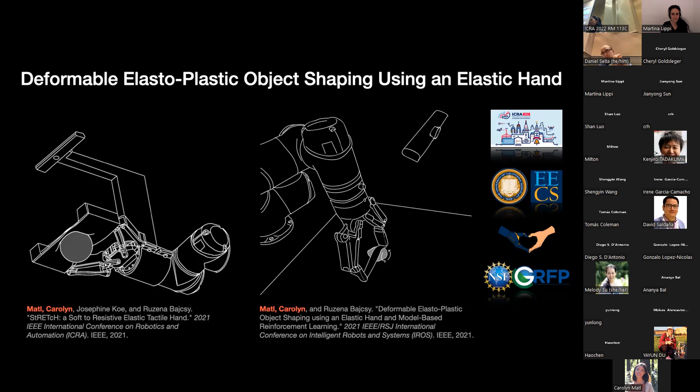Okay, so before we begin, let's first talk about what even is a deformable elasto-plastic object. In our work, and in fact many works that simulate these types of objects, we categorize doughs as 3D elasto-plastic objects - in other words, objects made of materials that exhibit both elastic and plastic properties.

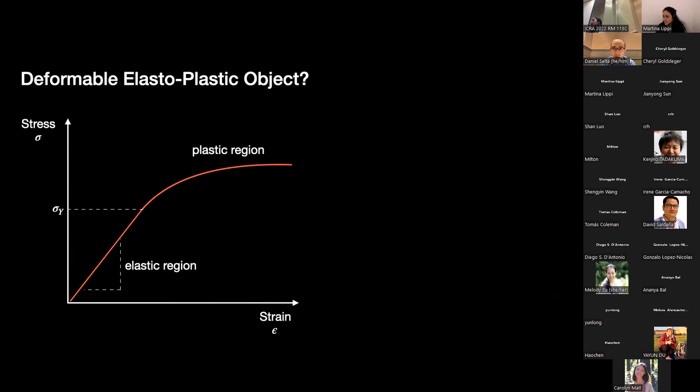A simple illustration of this characteristic should be very familiar to those of you who cook or bake. When you press into dough, some of it springs back, but there's also some permanent deformation that can result from this forceful interaction. So modeling this type of material sounds a bit complex.

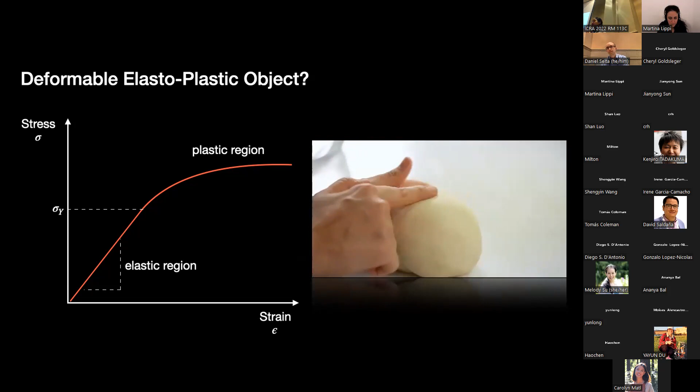And even so, we're already technically simplifying it by considering it as elasto-plastic, which is rate independent of the applied loading force, instead of viscoelastic, which is rate dependent. Luckily, in the context in which we have our robot interact with our dough, time is less of a crucial variable, so we can settle for this simpler material representation.

Okay, so given the characteristics of soft deformable material like dough, which has these regions of elasticity and plasticity, we wanted to come up with a way to interact with this type of material delicately - to enable both the perception of the geometry and stiffness of the material without creating any unwanted permanent deformation.

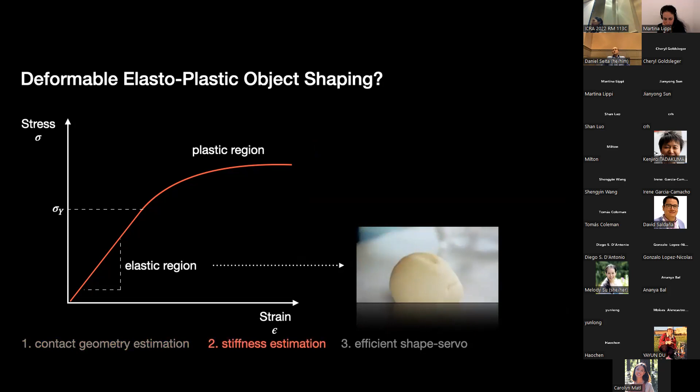So this would be perceiving within the elastic region, but we additionally wanted to enable intentional deformations of the material through interactions with sufficient load force. So this would be acting within the plastic region. And ideally, we'd like to also optimize how we interact with and manipulate these materials, and we want to explore these ideas within the context of shape servoing.

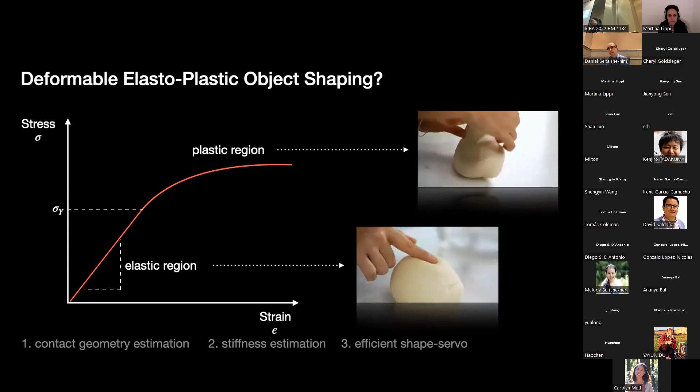Okay, so this talk will address these challenge criteria in two parts. In the first, we'll discuss how we designed a variable stiffness soft tactile hand that was used for both sensing and imposing load forces on deformable objects. In the second half, we'll examine how we can use this new technology to efficiently shape servo pieces of dough with model-based reinforcement learning.

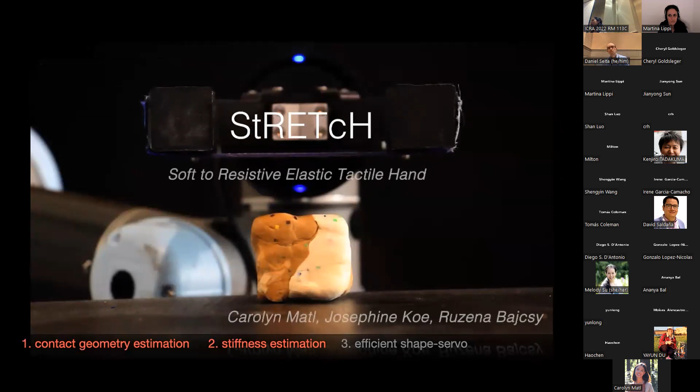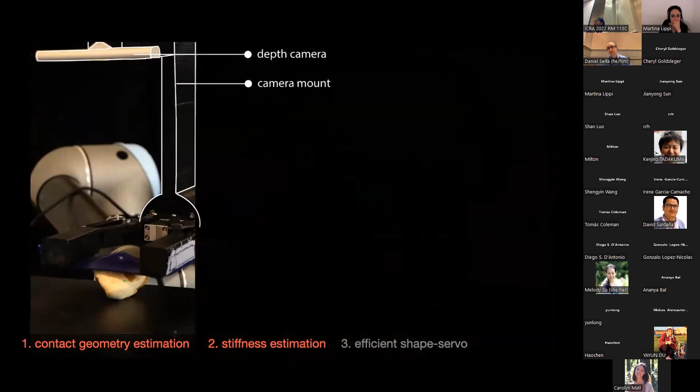Okay, so the first set of criteria ultimately led us to design this really simple hand made of soft compliant material, which we called StRETcH. The robot could vary the stiffness via a simple actuation mechanism by stretching the membrane.

So the soft tactile end effector that we designed can be categorized as a very simple soft optical tactile sensor, meaning that the tactile interface is made of soft compliant material, and when the membrane surface makes contact with the environment or an object, its deformations are imaged by an optical sensor like a depth sensor.

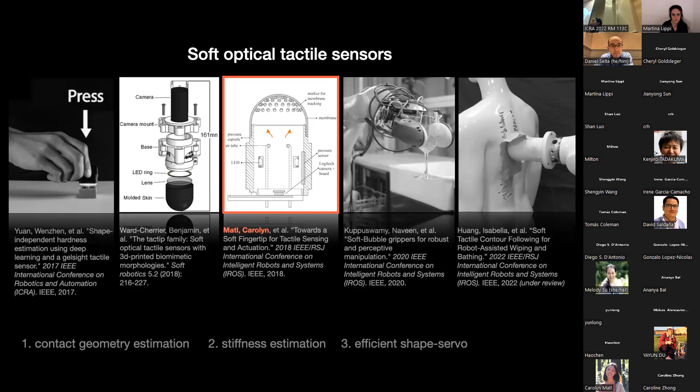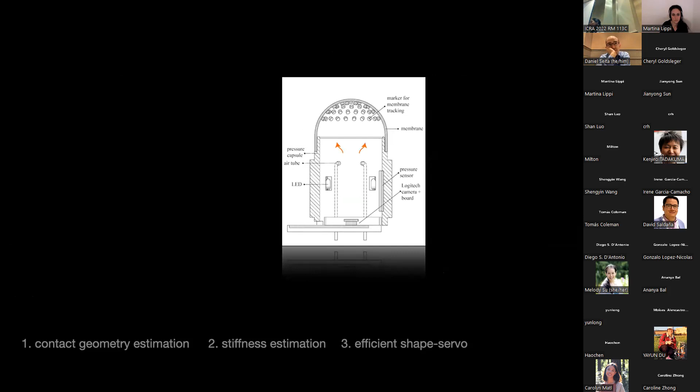Let me briefly explain why we did that. Because we were using pneumatics to maintain the shape of the fingertip, we could also leverage this actuation mechanism to stiffen the silicone membrane by increasing the pressure inside the capsule. So not only could this device act as a tactile sensor, but it could also act as an actuator and automatically adjust its stiffness to compensate for slipping.

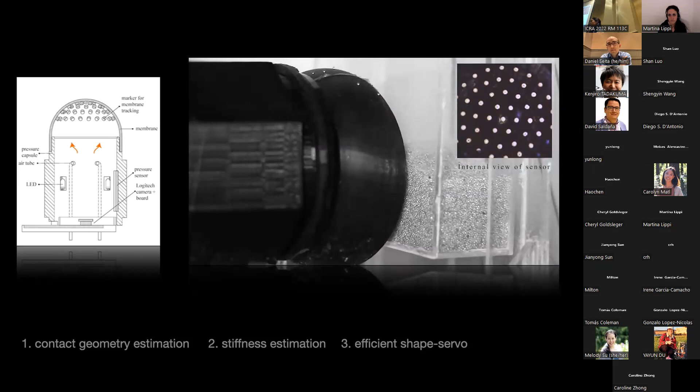For instance, to hold up this container that has dynamically changing mass. In this prior work, we studied this sensing and actuation duality and found that variable stiffness tactile sensing had a lot of potential in expanding robotic manipulation capabilities, including manipulation of deformable materials like dough, since we could leverage the fingertip in its soft regime to sense by interacting with the object within the elastic region.

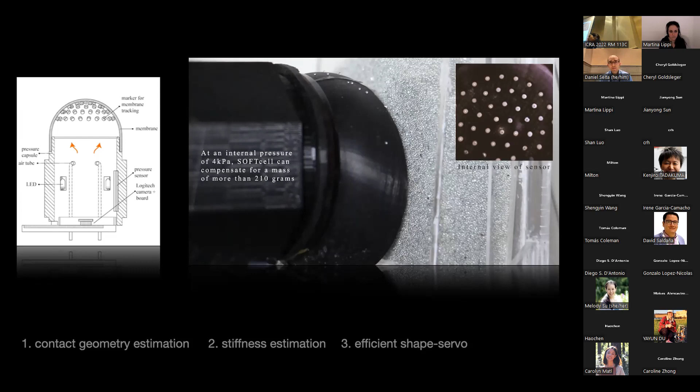We could also use the fingertip in its stiff regime to apply sufficient load forces to cause intended plastic deformations. But there were a lot of challenges with this prior design. For one, it was pneumatically actuated, which made it difficult to controllably vary the stiffness of the membrane. Overall, this was quite difficult and tricky to manufacture.

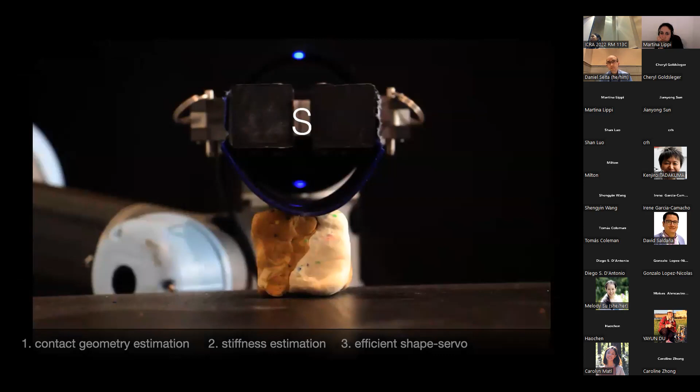Fast forward to 2020, the year of the lockdown, when we wanted to revisit this problem, but access to major design and fabrication centers was basically revoked. All of these challenges motivated the design of StRETcH, or Soft to Resistive Elastic Tactile Hand, which we were able to make with supplies I basically had already in my living room.

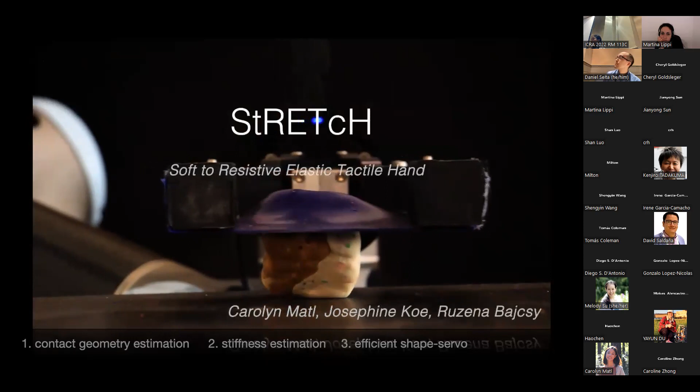As you can see, it's composed of a flat elastic membrane that can be cast easily by pouring EcoFlex silicone into a rectangular mold. We attach this membrane to a parallel jaw gripper using Velcro. So instead of varying stiffness via pneumatic actuation, here, as the gripper increases its width, the membrane's internal strain increases, which subsequently increases the stiffness of the membrane. This actuation mechanism makes variable stiffness much easier to control.

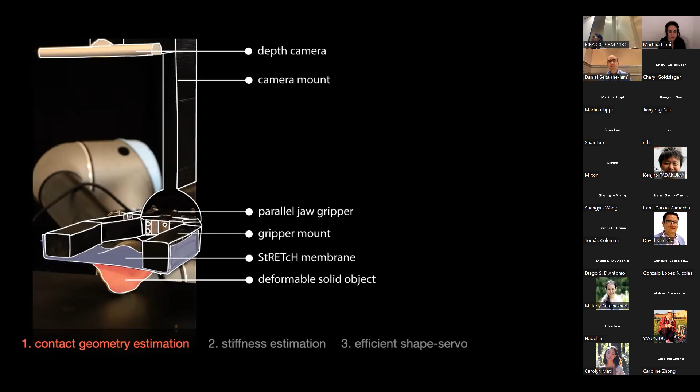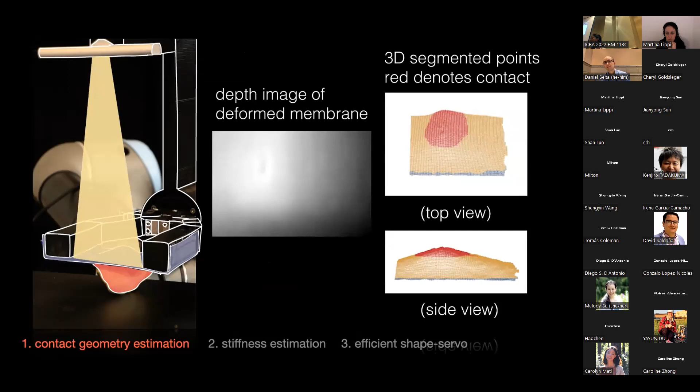We use a depth sensor to image the deformations of the membrane when it's in contact with an object. With the assumption that the object is convex, the robot can extract the portion of the membrane that's in direct contact with the object. So you can see it's really a bare bones, very simple flat version of the optical tactile sensors that we saw earlier.

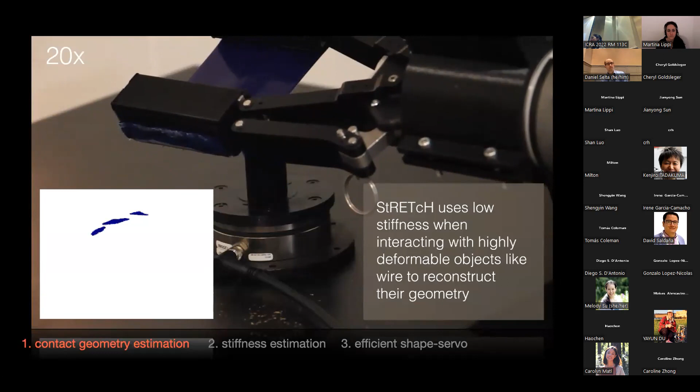Because StRETcH was so compliant, we were able to use it at its low stiffness regime to reconstruct the geometry of very deformable objects like paper boxes or 2D wire shapes like this circle, through touch.

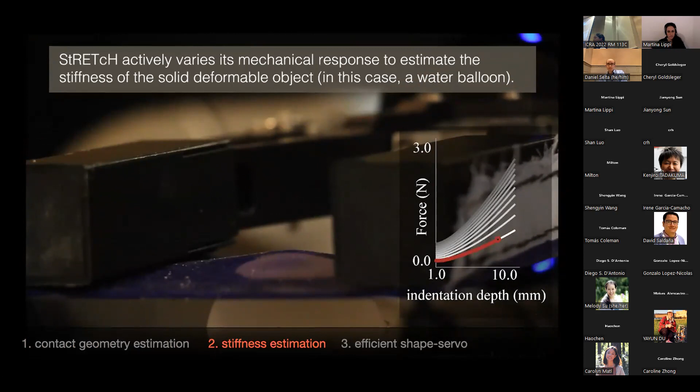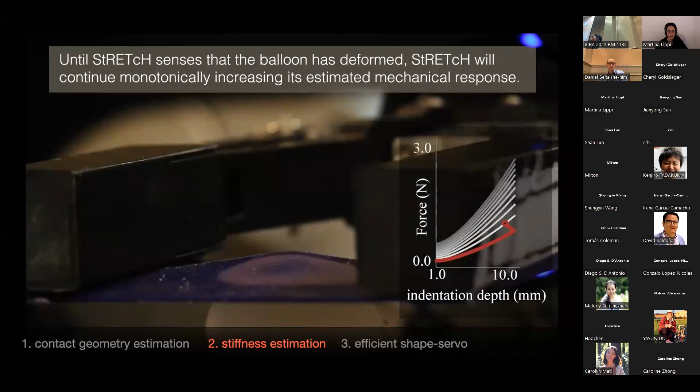Because StRETcH can vary its mechanical response, we can estimate the stiffness of deformable objects via active palpation. The graph on the right shows multiple indentation depth to load force curves corresponding to different stretch states of the membrane, where higher curves correspond to the membrane being stretched more. Ultimately, we want to find the force at which the object finally deforms. Since we imagine this object as having a single degree of freedom, we can divide this force by the amount of deflection to estimate a proxy for its stiffness in newtons over millimeters.

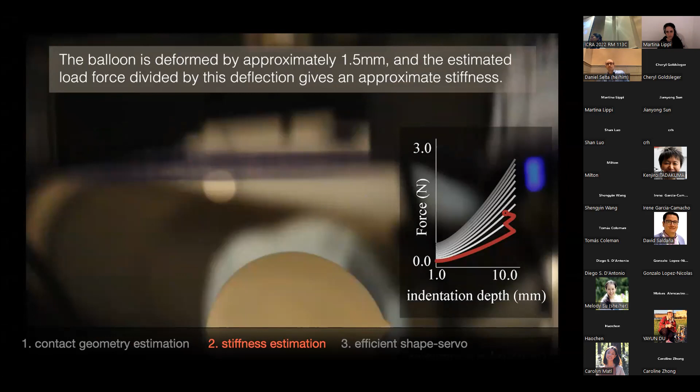We can use this force-depth profile to save time and efficiently modulate the stiffness of the membrane so that the load force increases monotonically with each new contact condition. So instead of starting from the lowest indentation depth every time the membrane is stretched, we can jump up this ladder to the next indentation depth that would result in the closest increased load force. This allowed the robot to efficiently approximate a stiffness value for the object.

The robot measured the stiffness of four balloons filled with different materials, as you see here. Even though these are technically proxy values for stiffness, since we're using this simple one degree of freedom model, you can see the values increase with each object as we would expect. The estimated values are sufficient for differentiating between materials within this range.

Keep this in mind, because we'll be reusing this proxy for stiffness in our dough rolling work, where this estimate actually enables more efficient rolling.

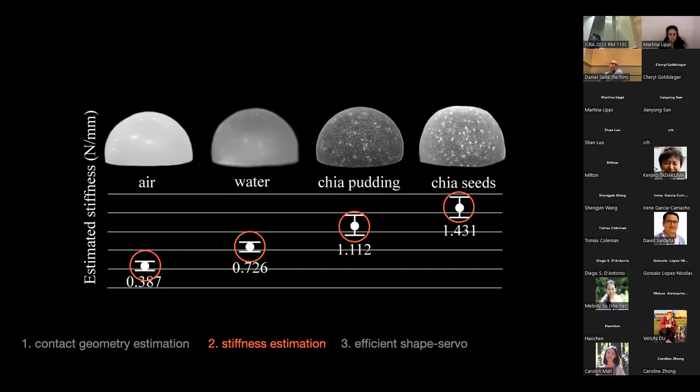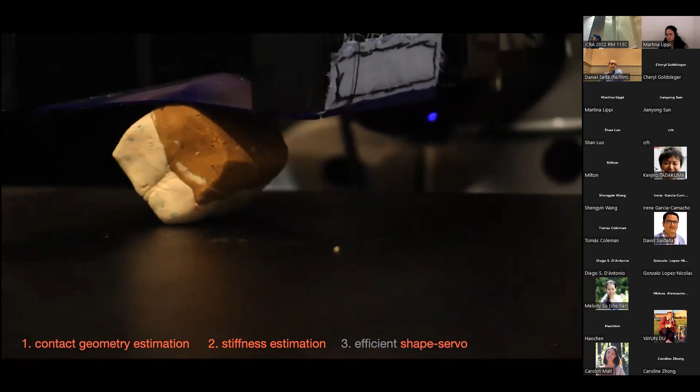For this first iteration of the sensor, we chose to use the robot to roll blocks of Play-Doh into balls of dough as a way of demonstrating the range of capabilities this simple sensor could offer.

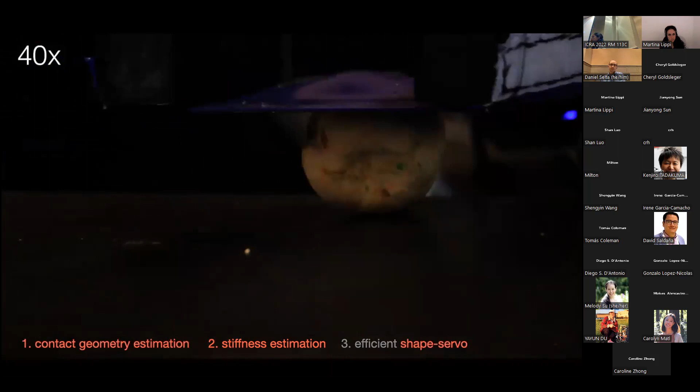First, stretch was used to measure the membrane stiffness needed to deform this block of dough. Once the robot measured how much the membrane needed to be stretched, it was commanded to roll the block of dough in circles, tracking the position of the dough in parallel to ensure that the robot was able to maintain contact with the dough while still being stiff enough to exert force on it.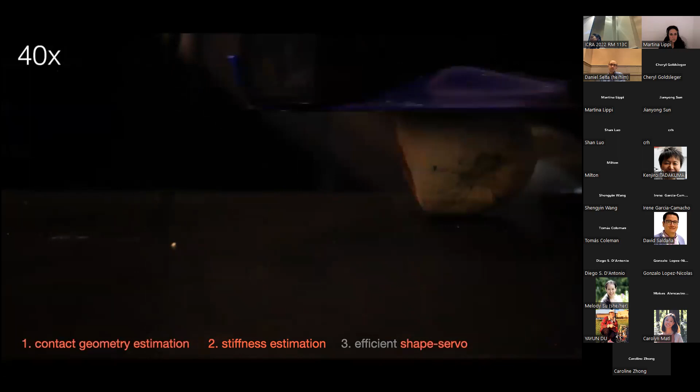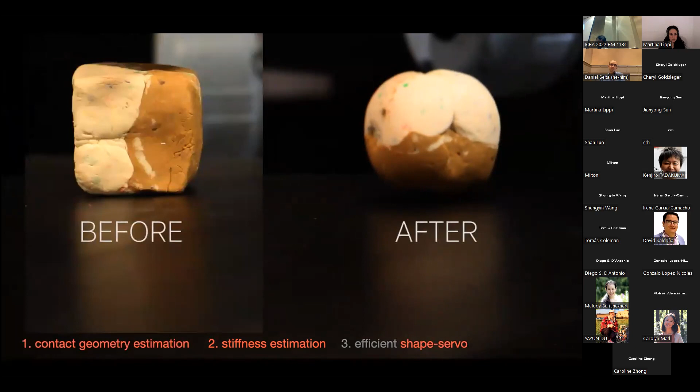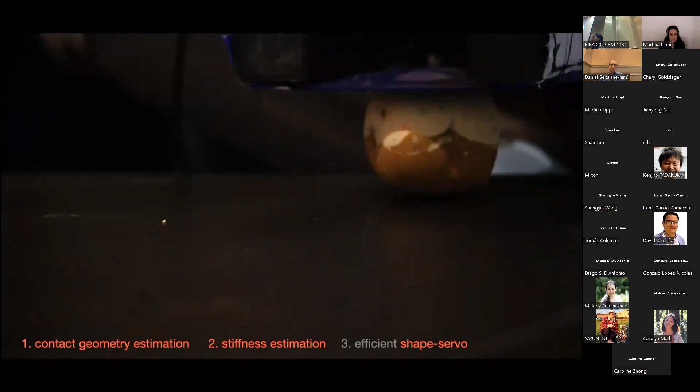This goes on for quite a bit, but once the robot thinks the ball is round enough, it stops rolling the dough. Stretch is then used at its lowest stiffness to measure the geometry of the ball, estimating its diameter. Finally, stretch is used at its highest stiffness regime to press the dough ball into this sort of scone shape.

For the most part, you can see the robot was able to shape these blocks of dough into circular cookies. We wanted to use this demonstration to illustrate how we could use variable stiffness soft tactile hands to safely sense the geometry and stiffness of very deformable objects, while also having the capability of imposing larger load forces to make intentional deformations, enabling new robotic manipulation capabilities such as dough rolling, shaping, and flattening.

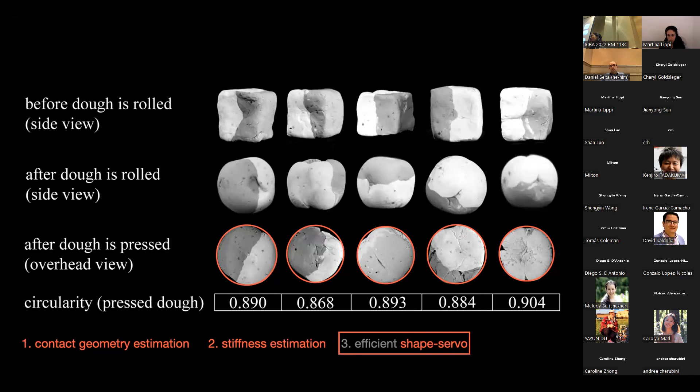So the next step is, how can we use this technology to more efficiently shape-servo this type of material? The dough rolling I showed earlier was based on a heuristic algorithm that sometimes took up to 20 minutes to execute. But we know humans can do this so quickly, so we must be able to do this more intelligently.

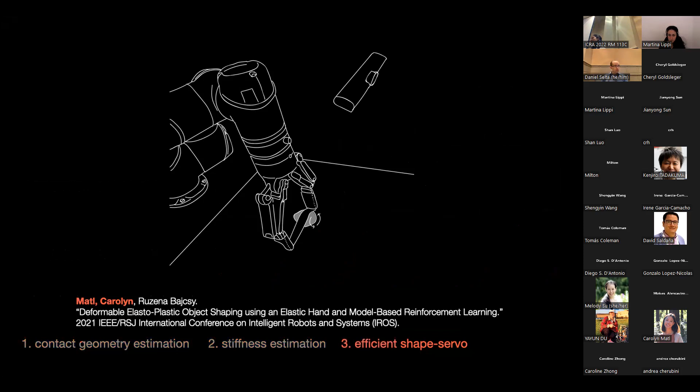That's pretty much the goal for the second half of the talk. We'll talk about how we used model-based reinforcement learning to accelerate the task of rolling out dough into a breadstick of a specific length. For this iteration of stretch, we made the entire end effector attachment out of elastic bands, and you can see here it's a slimmer version than the prior version.

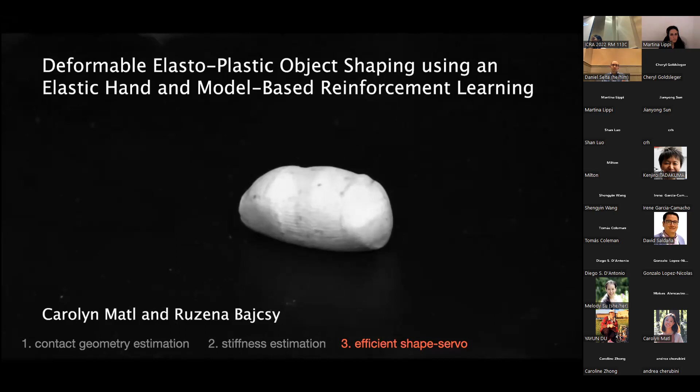The depth camera was also fixed at an overhead position instead of being rigidly attached to the robot arm. These design changes were mainly to compensate for kinematic limits required of the dough rolling task.

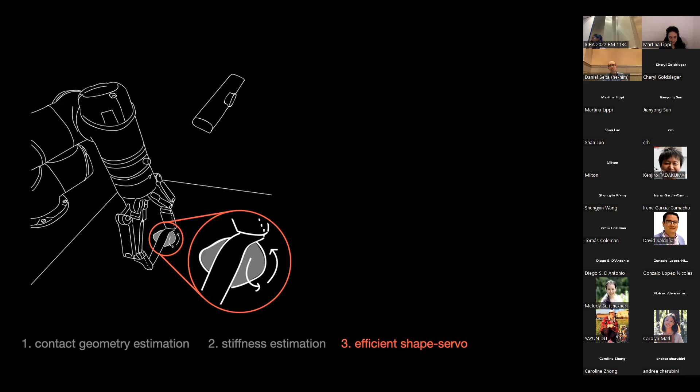However, notice that the task of dough rolling requires dynamic interactions of a deformable end effector with a deformable object. This is highly complex and high dimensional dynamics that are difficult to model, and as we heard earlier, even to simulate. So instead of explicitly representing the dough-to-hand interactions, we used model-based reinforcement learning to learn a transition function for these interactions—meaning we learn from data the relationship of, given an action applied to the dough and its current state, what will the dough state be after that action is applied?

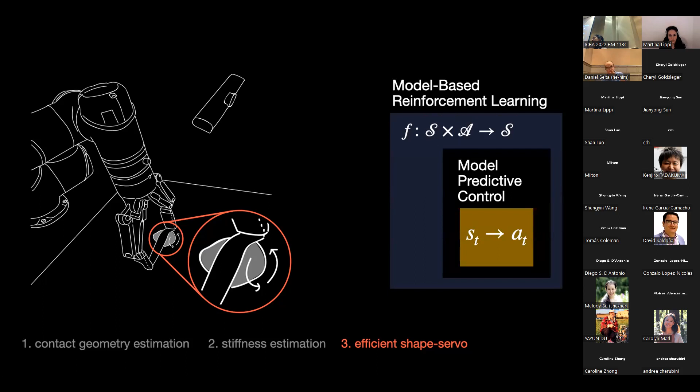And so that model is represented by F here. Now within this framework, we use model predictive control to select the best action to take at this time step, given the current state of the dough. This is done by optimizing the cumulative expected reward over a certain number of time steps into the future.

So we're looking ahead, where at each time step reward is calculated simply as how close we are to the desired goal, dough formation. What the reinforcement learning framework adds to model predictive control here is that it allows us to iteratively update or improve the transition model F to better reflect the dynamics of the dough and hand interactions. This means that if we start off with the wrong model or a poorly initialized model, the algorithm still has time to self-correct.

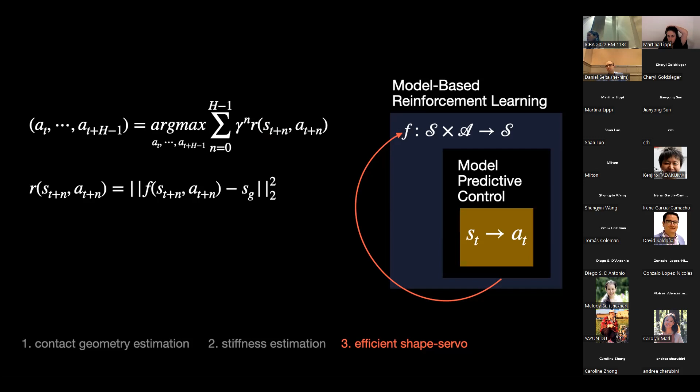So I know I did just mention that these interactions are extremely complex. This brings up a question we think about a lot in this community: how do we deal with such high dimensional data? In our case, because our goal was fairly simple, we were able to simplify the problem with some engineering to make it a lot more tractable.

To simplify the state space of the dough, we took the dough formation's bounding box and used those dimensions to track the dough's shape progression over time. As for what actions to apply to the dough, the two things we decided to vary were the stiffness of the hand's elastic membrane, which we could vary by stretching or closing the gripper, as well as the depth at which the robot pressed the dough.

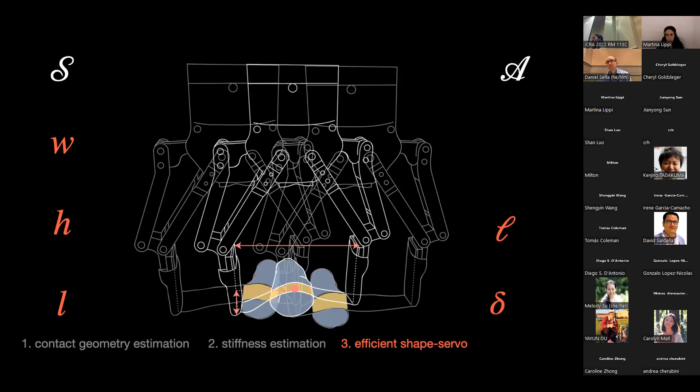These two parameters were chosen because they directly affect the normal force imposed by the elastic hand. The rest of the robotic action was fixed, in that each roll consisted of a back and forth motion at the highest point of the dough formation. Given all these simplifications and action constraints, we were actually able to train a dynamics model of these interactions with only about 1 hour of robot time, where the robot randomly interacted with the ball of dough under these action constraints.

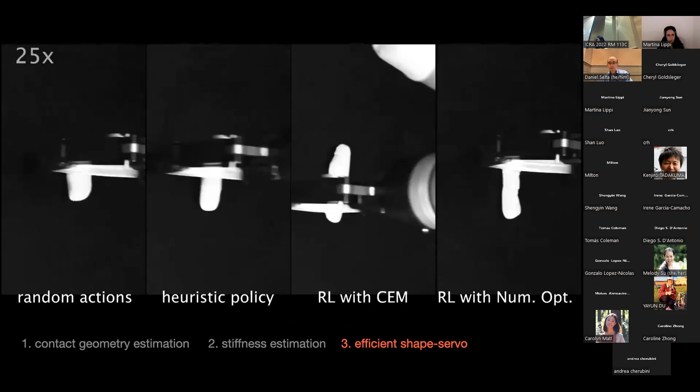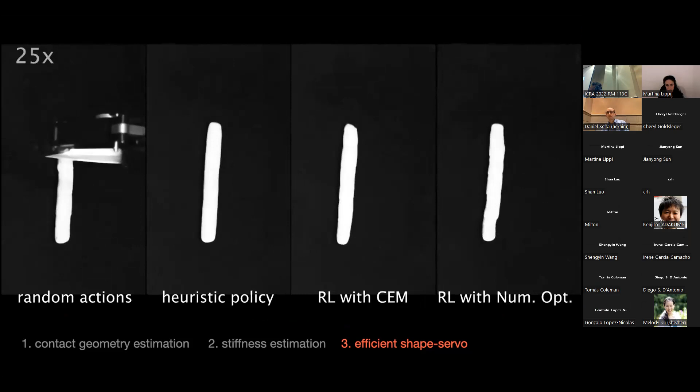So as we can see here, comparing the reinforcement learning methods with a random and heuristic policy, all of which were under the same state and action simplifications and constraints, the robot was able to roll the dough out into this 6-inch log with significantly fewer rolls. The robot was also able to efficiently roll the dough into different length breadsticks up to basically a foot.

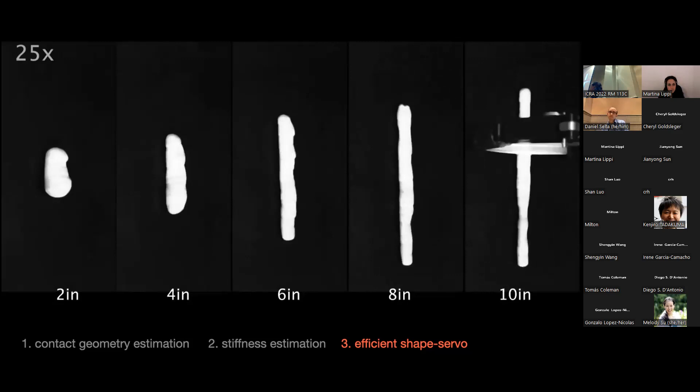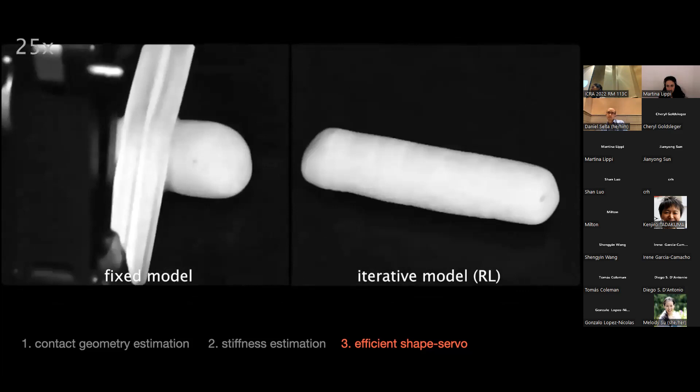However, what happens if the dough being manipulated now is not the same dough that was used for training? Maybe it could be a drier dough, which could cause it to be less malleable or stiffer. It could also be more well rested, meaning it's much easier to plastically deform. This is a real problem, because if any of you are familiar with working with dough, the feel of the dough can change quite quickly.

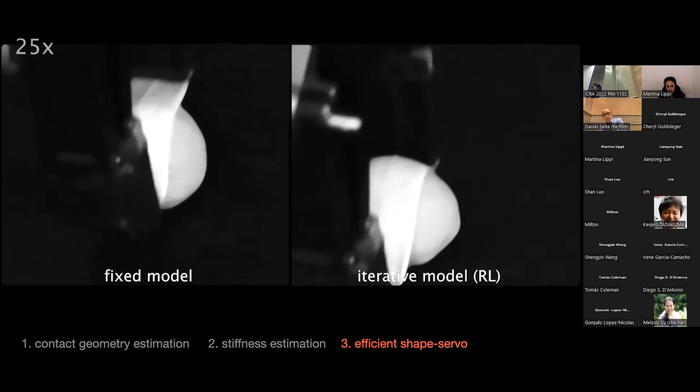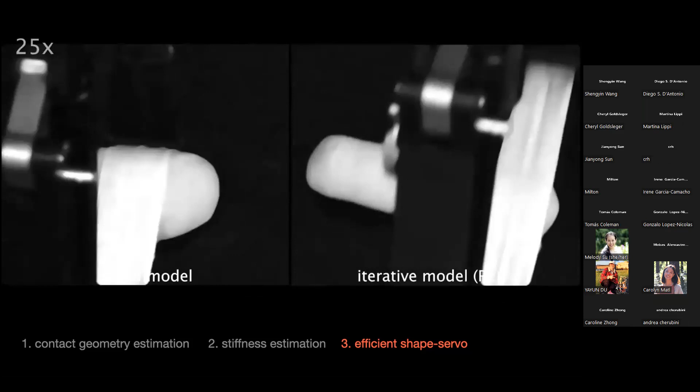But because this is a model-based reinforcement learning framework, it allows the robot to iteratively improve the dynamics model given new observations as it interacts with the dough in real time. So let me replay that. Here we were able to show that it's able to self-correct and efficiently roll out a stiffer dough, much faster compared to when using a fixed model with just MPC.

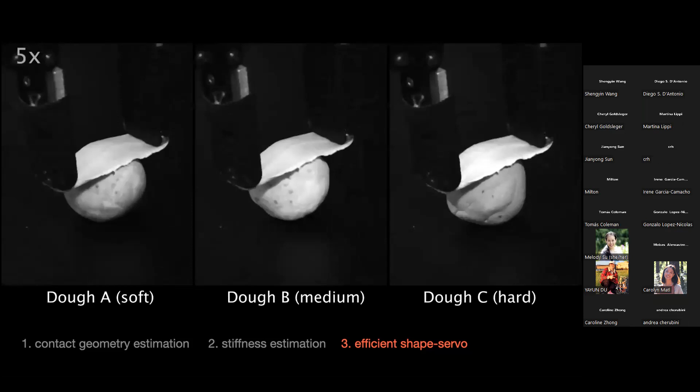But you might ask, well, in our prior work, we showed how we could use StRETcH to approximate a proxy for the stiffness of these objects. Wouldn't it be great to use these estimates to calibrate the model more quickly so that we can more efficiently roll out the dough? And yes, you would be absolutely correct in that it does help. Here we're showing our robot measuring the stiffness of these 3 different doughs that are hydrated at different hydration levels.

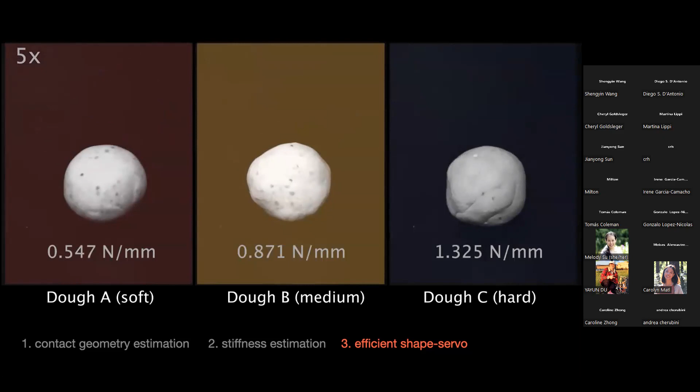We were able to demonstrate through our experiments that these stiffness measurements do indeed help the robot regress to a better dynamics model for the dough interactions, and this leads to significantly more efficient rollouts.

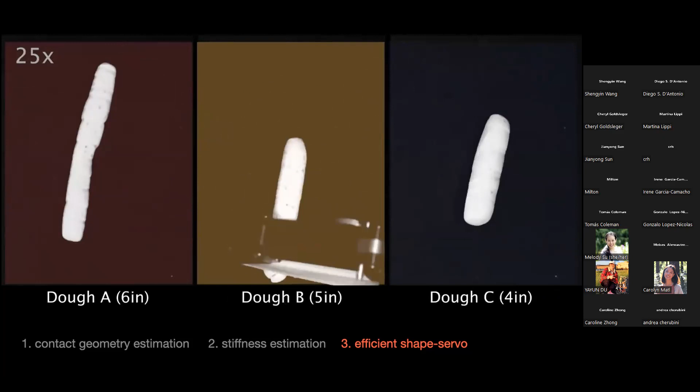If the robot sensed that the dough was soft, it would use a different rolling technique than if it sensed the dough was hard, and the actions chosen by the robot actually made a lot of intuitive sense. For a hard dough, the robot chose to apply actions corresponding to higher force output, versus when it sensed a softer dough, it first applied low force to the ball until it formed into a short log, then increased the membrane stiffness to finish rolling it out into a longer log.

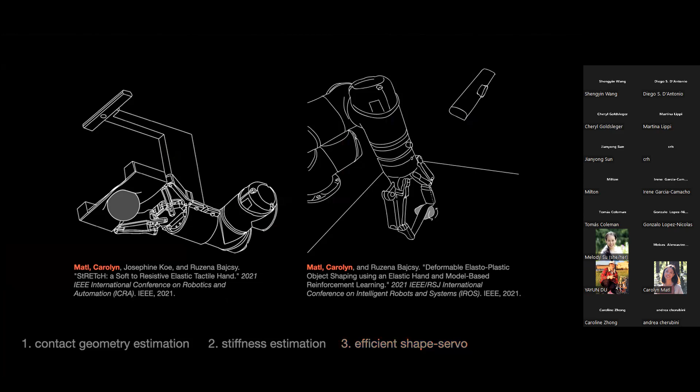As a brief recap, through these two works, we explored how we could use a very simple variable stiffness soft tactile sensor to sense the contact geometry of very soft deformable objects, as well as to measure a proxy for stiffness for deformable objects, and finally to use that information to efficiently shape-servo dough.

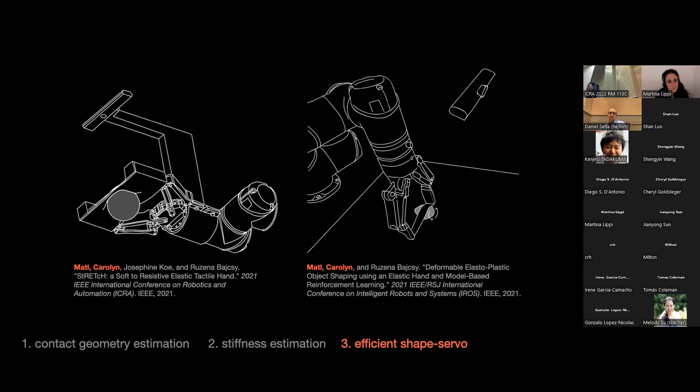There are several avenues of future work to explore here, since we really viewed this work as a stepping stone into new directions for soft robotic manipulation and sensors. Future work includes, for one, while our simple state and action space of the dough allowed us to simplify the dimensions of our problem, a higher dimensional space would certainly allow us to explore more interesting shape servoing problems, as well as to create a tighter sensory action loop.

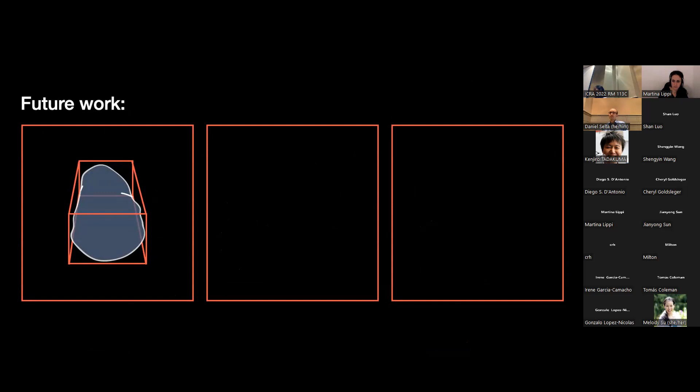Furthermore, there's been a lot of great recent work on modeling deformable contact and deformable objects, some of which was presented today. So I would love to see how those models could be incorporated into a robotic system to deal with materials like dough.

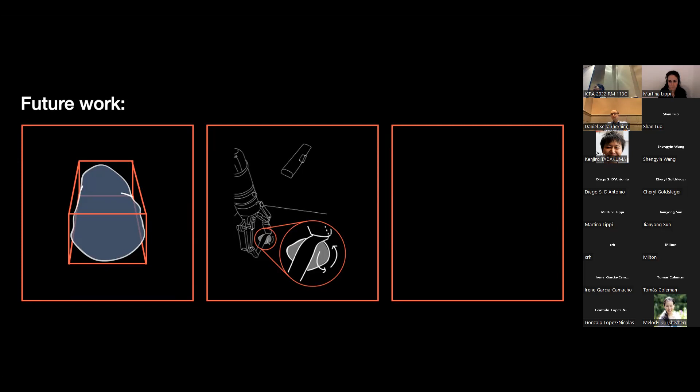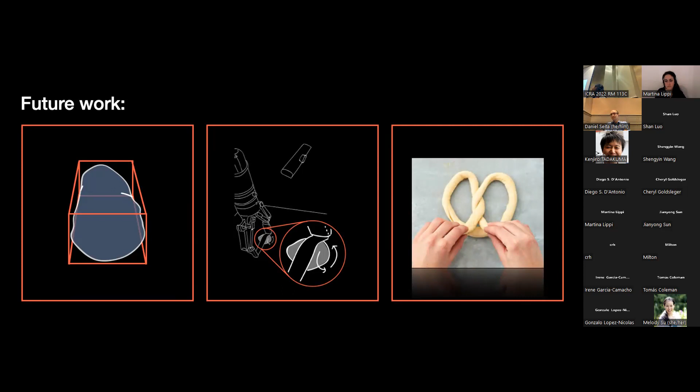Because this work was done during COVID times, Play-Doh made the experiments a lot more manageable to do in a household setting, but the dream would be to shape real dough, which is way more elastic, more malleable, sticky, and tricky to deal with. But at least at the end, you could actually eat what you make.